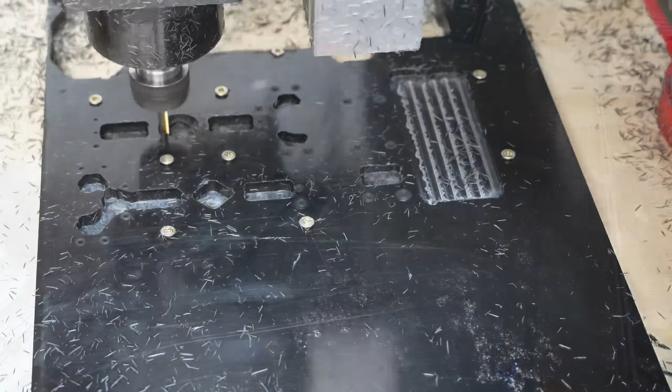Hey there, this is Seth Schaefer from Team Just 'Cuz Robotics, and in today's video I'm going to talk about the design process that I go through to design a competitive 3-pound beetleweight combat robot. This one right here being called Derivative, that's about to compete at the November 1st NHRL, and the many other complications that made it so that even though I had this design 3 months ago, I decided to abandon it and completely redo everything from scratch at the start of this month, even though the competition is on November 1st.

So this bot's going to be competing in 11 days, and I've still got some last minute tweaks and changes to make, which I will talk about. So in this video, I'm just going to talk about how me, as somebody who's been competing in the combat robotics world since 2017 and worked professionally as a mechanical engineer for several years before quitting to run a combat robot company full-time, approaches the design of a brand new combat bot. And you'll be able to learn with me along the way what things I'm thinking about when I go about doing the 3D modeling and design choices for any of my bots.

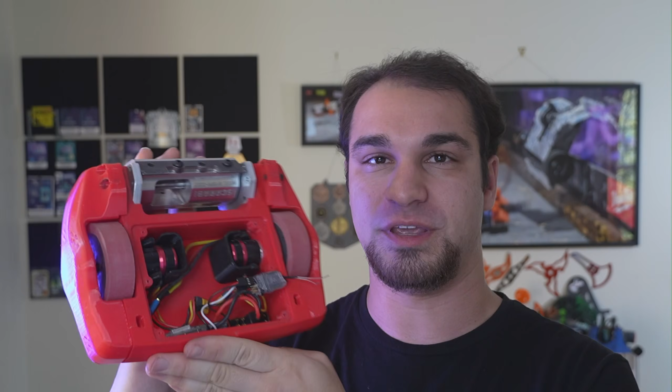All right, I'm gonna leave out some of the details from the first few attempts I made recording this, because otherwise this video is gonna be an hour long. Let's first talk about this thing. This was originally going to be Derivative, although at the time I had no idea what I was gonna name it because I hadn't even entered the NHRL event lottery yet. But I commissioned this design from a builder on the NHRL Discord who goes by the username Rinsler, or just DJ when he's competing.

And Rinsler designed this entire chassis for me about 3 months ago. I paid him for his time. I am not saying he doesn't deserve the money that he was owed. I think whenever he asked me for money, he was paid right away. But I forget if that was up front or just within a couple of weeks of when he started. But either way, his time was compensated. He actually did make some design tweaks to this for me after I paid him too, because I had some issues with transferring everything from Onshape, where he designed it, into Fusion 360, where I work, and he relabeled some things to make it a little bit easier for me to work with his files.

But ultimately, there were too many issues with this design, and the experience that I have making many, many robots that are meant to be mass manufactured from selling the SSP kit, and the fact that I was at least considering trying to make this robot potentially a kit that people will be able to buy in the future, I'll talk about that more later, meant that this design wasn't really going to work for me. There's kind of 3 main reasons why I had problems with this design, and I think most of them aren't really DJ's fault at all. There's one issue that's kind of his fault, but is something that's really easy to overlook and something that I could personally have very easily fixed, so not a huge issue or anything.

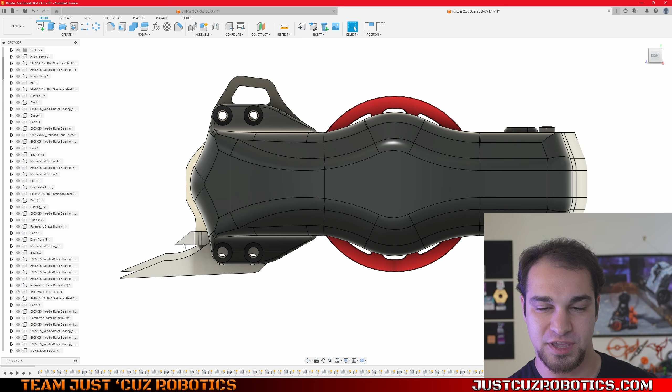And that is just the fact that right now the drum spinner hits the floor. The teeth go just below the aluminum uprights here, and so it hits the floor all the time. Now, it's designed to have forks bolted on. In fact, I can click over to my overlay view. So this is what the bot's supposed to look like. So these forks do stick down far enough that the drum definitely can't hit them, and that's not a problem normally, but this is a combat robot.

Those forks are for sure going to get torn off, and so that was not really good enough for me personally. And also because of the flexibility of TPU and everything, even with those forks bolted on, I had issues with the fork just tilting up and the drum could still kind of graze the floor a little bit, so I just wasn't super happy about that. So the second biggest issue is the assembly process to get the drum on and off of the bot.

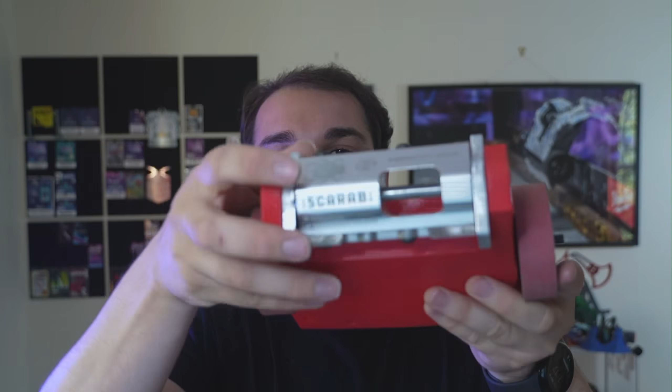So the way that he designed this is actually pretty clever. So there's kind of 3 parts here: this big TPU wheel guard, this big TPU wheel guard, and then this main body. So those pieces kind of fit into slots here, and then there are TPU pins that go in to hold them in the back. In the front, however, they screw on with 4 screws here, and that's not a huge issue, but these 2 aluminum pieces are taking like all of the force.

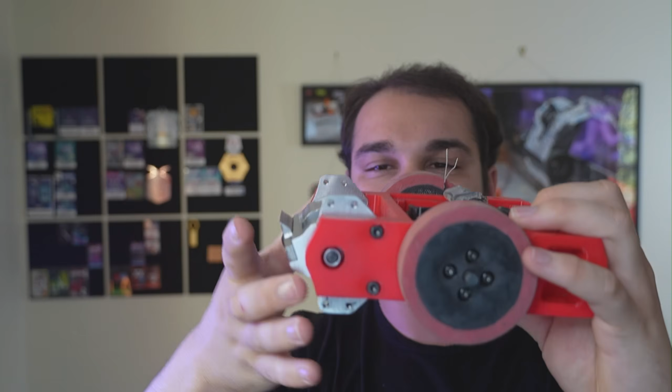Every time this robot hits anybody, drum is spinning like this, so it's going to hit another robot, and it's going to try and plant this into the floor, so all the force path is going from this shaft in the middle straight down to the floor through these aluminum pieces. But those aluminum pieces aren't the only thing that the shaft is passing through, because it's actually passing through a little bit of the thickness of the TPU on this side and a little bit of the thickness of the TPU on this side as well.

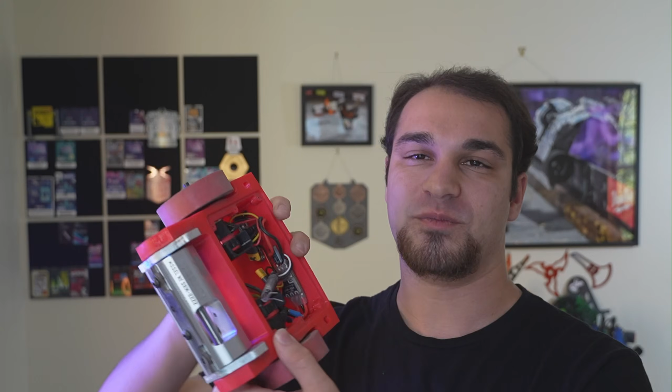So to actually assemble this, you have to fit that shaft through TPU, then aluminum, then a spacer, then this part of the drum, then 2 spacers, then the stator of the drum, then this piece of aluminum, and then this piece of TPU, which is extremely, extremely annoying. So I just found from taking this apart and putting it back together like 3 or 4 times, serviceability in the pits was not really where I wanted it for this design.

And then that could have been fixed. Rinsler and I talked about ways to fix that, which would be pretty simple. Make these pieces, instead of 1/4 inch wide, be 12 millimeters wide, which is how I designed the shaft length for the drum, was to go through either 1/2 inch thick or 12.7 millimeter, or just 12.0 millimeter thick uprights. So if these were all aluminum that was just 12 millimeters thick, that would kind of completely eliminate that problem. And that wouldn't be a real issue.

So again, this is the sort of design change I personally could have made if I felt like it to fix things. But yeah, I just didn't decide to go that route because of the third major issue, and that is 3D printing these would really, really suck if I had to make like 10 or 20 or 30 or 50 of them, because each bot requires printing 2 of these pieces in this orientation on the bed like this. So there's a ton of 3D printed supports under here. So a pair of these takes 5 hours. And then this central body also takes 5 hours. So that's 10 hours of print time per kit on a high-end Bambu Lab X1 Carbon or P1S 3D printer.

And I can't even print both the chassis and the side guards at the same time on my A1 Mini, but I can on the X1 or P1. But still, that's 10 hours of printing per chassis, a lot of chances for something to go wrong and lose a lot of filament in that process. And I'd just be churning through so much filament. Right now I sell the SSP combat robot kits. Those use a billet UHMW machined chassis. It's really, really expensive, but it's, in my opinion, kind of just the best.

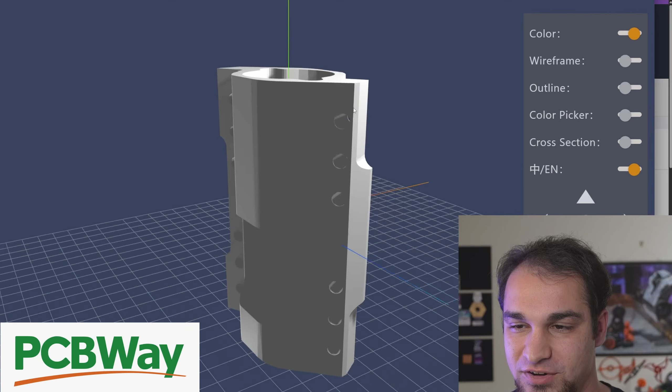Right now, they're actually making a new version of the SCARAB hub drum, and I will show you what that looks like right here. This is the part they're making for me, and hopefully it gets delivered in time for the November 1st NHRL, and I'll talk about why I ordered this later in this video.

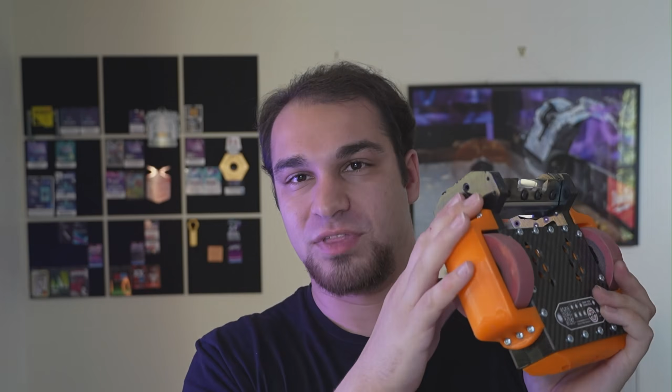The reason that I can do that with these and not with the SSP kits is that these parts are all able to be machined from the top down on a single sheet of material. And I'll show you exactly what I'm talking about. So this is what the frame of the robot looks like, and it's 4 parts, right? You've got left side rail, the mirrored left side rail. This is the same exact thing, just flipped upside down. And then we've got the front panel, and we've got the rear panel, which is that one.

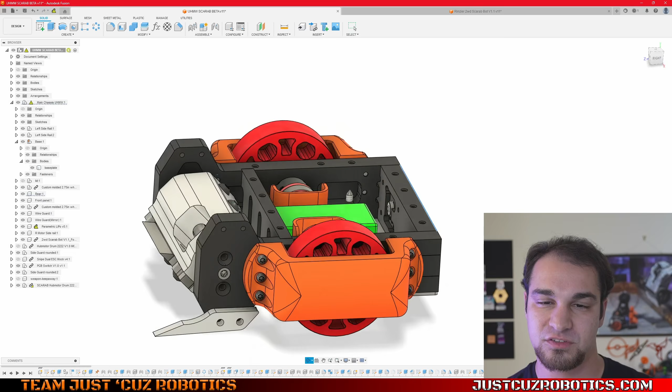So 4 pieces. You'll notice the thickness of this is 12.7 millimeters, or 1/2 inch, because you can buy 1/2 inch stock here in America much more easily, but every other dimension on here is actually designed in metric for the most part. So like this is 102 millimeters wide. That's the spacing needed for this drum, for instance. And the overall length is 156 millimeters. And then the height is 35 millimeters, not including the lids. So from here to here, 35 millimeters exactly.

So I did everything in metric because I am an engineer in America, therefore I am cursed to always be switching between imperial and metric measurements. Sue me.

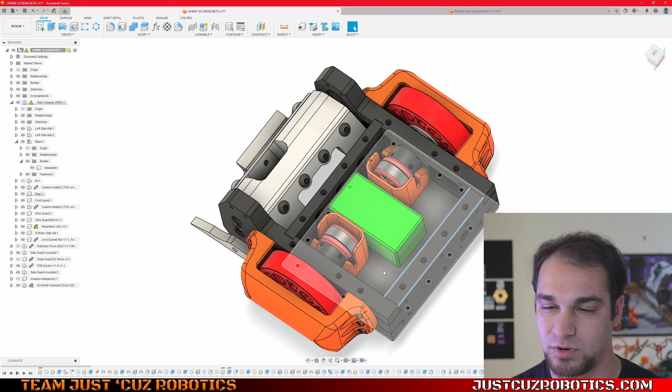So this frame uses all 1/2 inch thick parts for the sides, the rear, and for the front, it's 8 millimeters thick. I can change this to whatever I want, but I decided it doesn't really need to be that thick in the front because this isn't really supporting anything. It's just there to be a barrier and to prevent the battery from sliding into an active spinning drum. And it also needs to have screws to support the lid, so it needs to be thick enough for that.

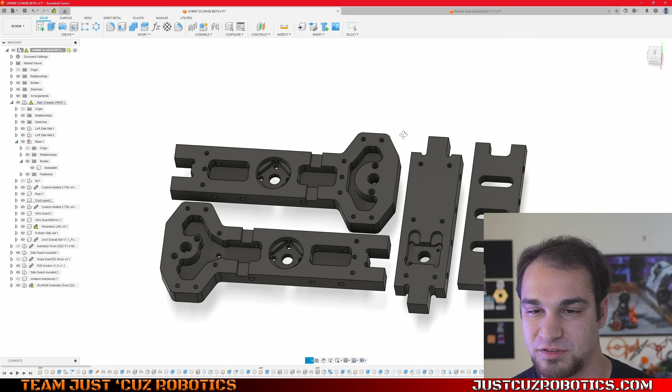So this is what that looks like on my CNC table, basically. All these parts are cut out of a single 1/2 inch thick sheet, and I just face it down to 8 millimeters thick on this part, and then everything else is just machining the same stock thickness. So I don't even have to face off anything else really. And I can just go top down, single operation, cut out everything, leave tabs, cut those tabs with the oscillating multi-tool later to separate the parts, maybe sand them a little bit, and that's pretty much it.

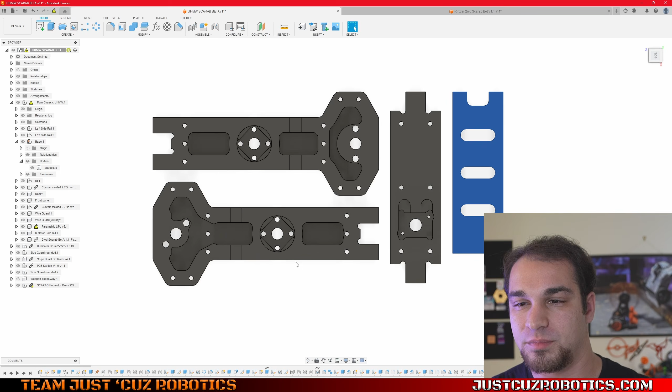So everything else can be done by my CNC except for these holes on the edges. So to do that, I came up with a separate jig that I'll show some video of in action, but that jig is actually just 3D printed in PLA, and it just allows me to slot these into slots like a toaster, and then machine the holes all the way through. I can just drill them all. So that drilling process takes like 10 minutes or something. It's kind of slow, but not too bad.

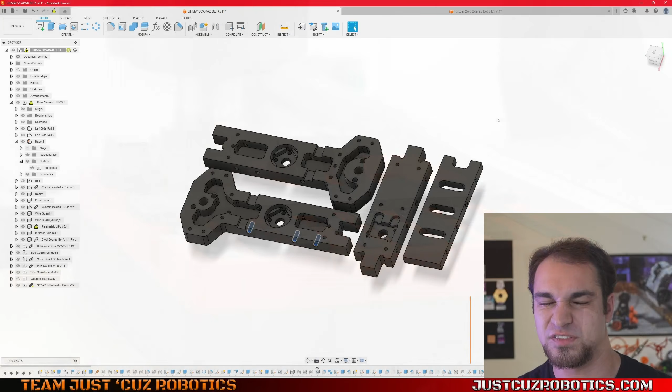And the processing time to cut out an entire frame like this on my CNC is maybe half an hour, plus 10 minutes of drilling. So we're talking like 40-45 minutes of total machine time per chassis instead of 10 hours of 3D printer time. And I can batch these out, so I could just have the machine cut up to 4 of them at a time out of a single 12 by 24 inch sheet of material, which is really convenient, because then it's just like 2 hours of machining at a time basically, or in maybe a 4-hour day, I could get 8 frames done or something like that.

So really not too bad for mass production. Yeah, so I decided to abandon this idea and move on with this idea. And the internals of this are very, very similar. So I guess I may as well just go back to the CAD view and you can see it.

I mean, you were just looking at it, but I'm using the same exact Blitz Pro drive motors, same exact battery for right now, though I did order some custom batteries, same exact wheels, although I also ordered some custom wheels, which the supplier, of course, naturally told me would take 20 work days to produce, which is about 4 weeks, and it has now been 9 weeks and I don't have them yet, so I may or may not be running the urethane wheels that are on there right now at NHRL, but we'll see.

And yeah, the same exact SCARAB drum weapon, of course. So if we go back to my webcam overlay view here, you can see the SCARAB beta drum on here, exactly the same as what was on the TPU copy of the robot. And instead of having aluminum and TPU, I just have 1/2 inch thick UHMW, and the shaft bolt passes all the way through those. Super easy to service because there's nothing blocking your access to this either.

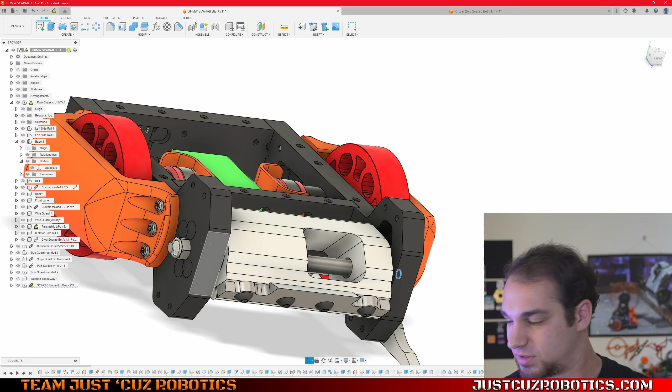So like with the side guards on here, you can't access that bolt anymore until you unbolt the side panel. So you have to pull out this pin, undo 4 screws, pull this off, undo this bolt, undo these 2 bolts, undo these 2 bolts. Same on this side. It's like so many more operations to service the drum on this.

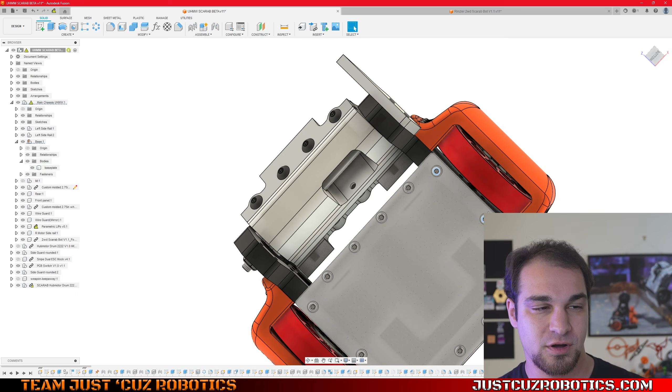Whereas on this version, this looks a little bit messed up because there's something weird with the side panel, but basically you remove these 2 screws on the opposite side for the stator, and then remove this nut and bolt, pull the bolt through, and you're pretty much good to go to swap the drum completely. And if you want to pull the entire side off the robot, that only requires removing these 3 screws, and then the same on the other side, on the top. And then you can pull an entire side of the frame off as well to get the drum back in much more easily. So everything is kind of tabbed and slotted together.

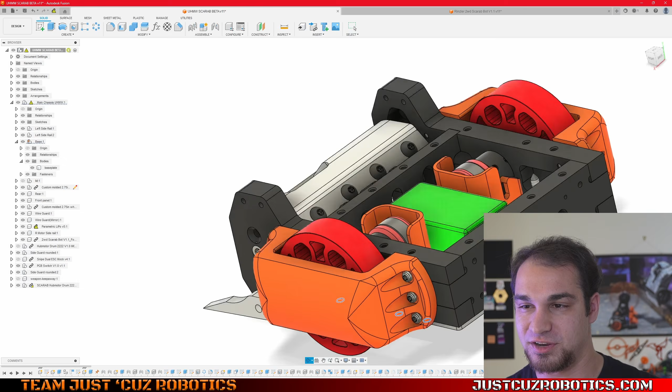If you watched my integration video, you'll know that my frustrations with tab and slot construction being done improperly were quite great in that video. So I did it myself this time, knowing that it would be done correctly. So when you're designing something to be CNC machined, it's being cut with a round end mill, so you can't make sharp internal corners. You can make sharp external corners. Imagine this, right? Here's my end mill. It's 0.125 inches in this case.

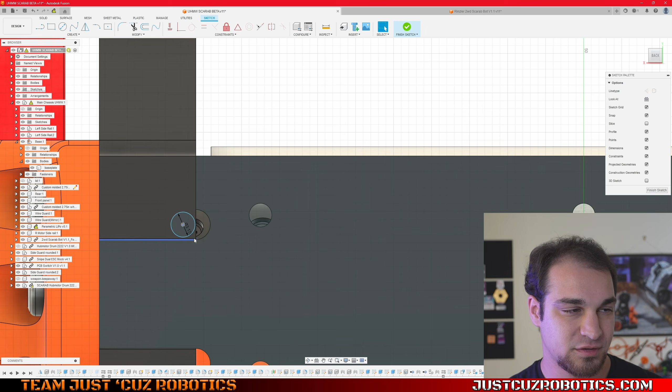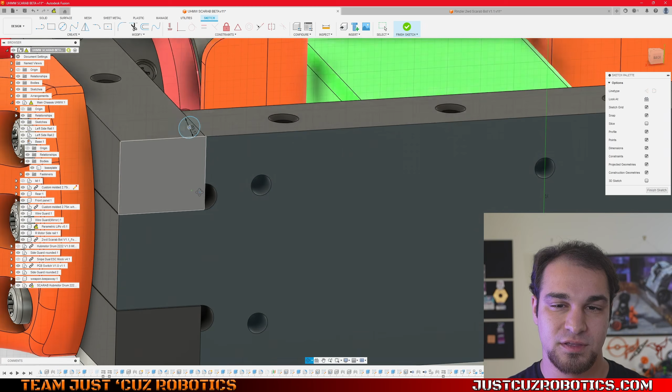So the end mill can travel in 2D space. It can do this path. But if it gets to here and then it goes up, then you've got a radius in this corner right here. So you can't slot the square peg into a rounded corner hole. So that's why the end mill has to go past there. It has to go into this pocket here. And that way I can have effectively a sharp corner, just not really. And so this all tabs and slots together.

So the side panel looks like this. The rear panel looks like this. That slots in. And then the front panel, instead of doing a tab and slot thing where I had a rib that sticks into the side panels, because then I would have had to have dog bone corners in 4 places or something.

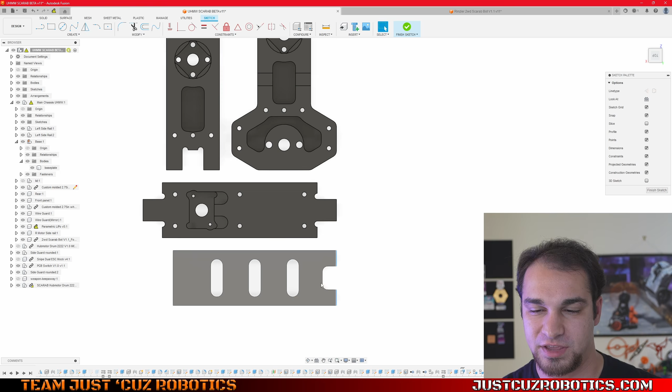Instead, what I can do is take advantage of the fact that with the sides, all I really have to do is cut a channel like this. So I can have the end mill pass all the way out of that side, all the way out of this side, and make essentially a nice square cornered sharp pocket on this piece. And then on the front, these can also be square corners because they're just going into this slot full height. So on one side, there's a gap because the wires for the actual hub motor drum fit through here.

So they go in around here, go down this way, through that front panel gap, and then they come out into the chassis over here. So I can show you on the actual robot. Hopefully it'll let me click on it. So that's that wire path on the actual robot. So you can see it passes through that gap in that front panel.

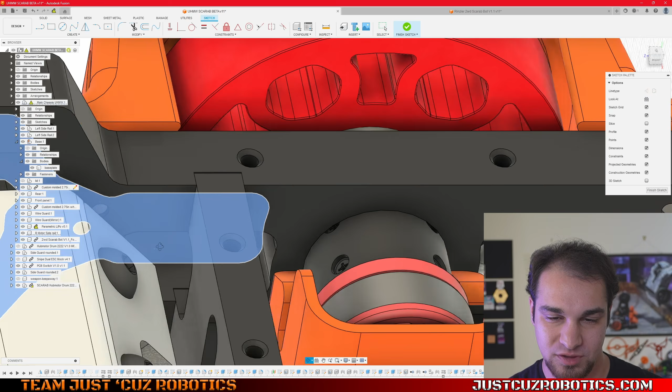So there's tons of clearance. It's pretty easy to get the wires through here. That was also a huge struggle on the TPU version, but again, that's something that could have been fixed. So yeah, as far as getting the hub motor on here, it should be way easier to put it on and take it off.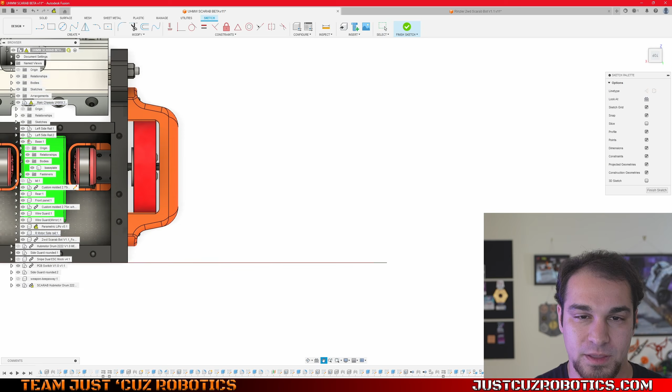Then we've got the drive system. So the drive system is my Blitz Pro drive motor, same that Division version 4.5 is using, but I'm using gigantic wheels. These are 70 millimeters or 2.75 inches in diameter. And so the motors, if we take a look at the side rails again, I just pocket into here. Again, I'm dogboning these corners a little bit and kind of having the end mill go past because there's otherwise kind of a sharp corner here.

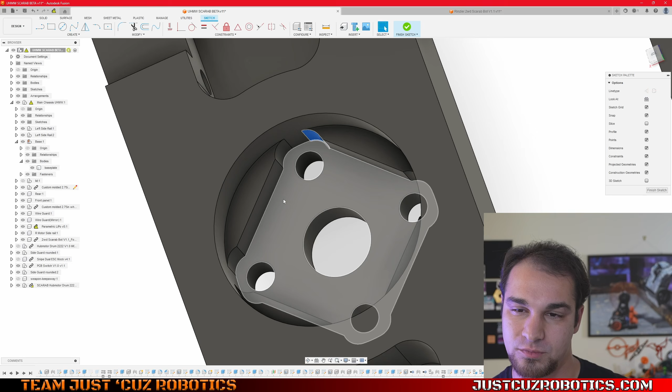So the front face of the motor is grabbed here. It can't rotate because there's a square imprint on it that gets locked by these faces. And then the round gearbox gets supported partially by this feature. And this is just a through hole for the shaft and circlip and everything to get through. So just a much bigger hole than I needed. I think I did an 8mm hole for a 6mm shaft.

So this gives you a better idea of how exactly the gearbox integrates into the frame. So if we look there, it's about halfway through everything. Kind of seeing the internals of the gearbox, that's a little confusing, but you can see exactly here. So that's the round portion of the gearbox, and then the square face plate you can see up here.

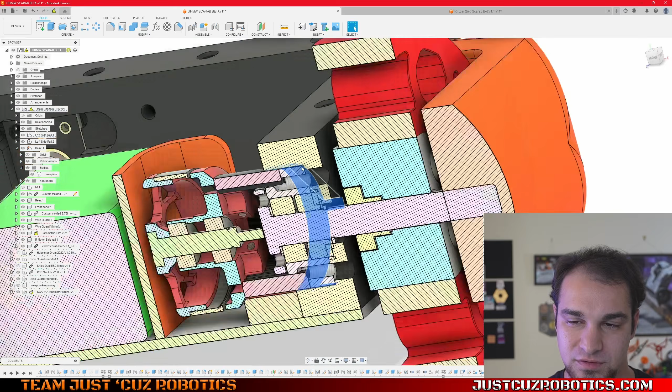And if I hide the side panel temporarily, you can see exactly what the front of the gearbox looks like. So you've got that square imprint. Go back to my cutaway view and put back on the side rail. You can see how it pockets nicely in there. And then I've just got clearance for M3 screws here. And that's pretty much it.

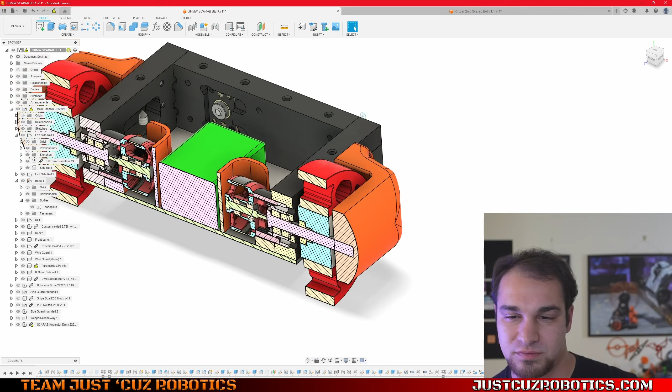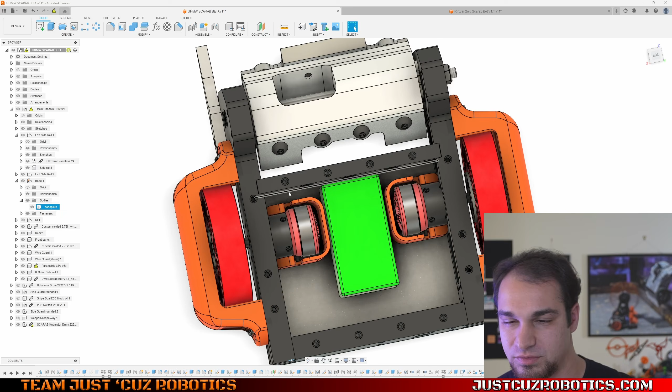So pretty simple. And then these wire guards, I took inspiration from how DJ did it in his design. I actually quite like that because there's no hardware needed to install these. They just get slotted onto the motors from the bottom, and then you put the base plate on and that retains them. And they just can't move forward and back because there's no clearance, which I really liked. So I stole that feature. I redesigned these from scratch, but I stole that feature of his design for my own.

And there's just slots on both sides for this wire channel to come through so that these two parts are 100% identical. Side panels, again, on the production version of this, the side panels will also be 100% identical. It's just on my version right now, because the hub motor wires exit straight through this way, I needed 2 different ones. That's why this looks kind of funky with these overlapping holes.

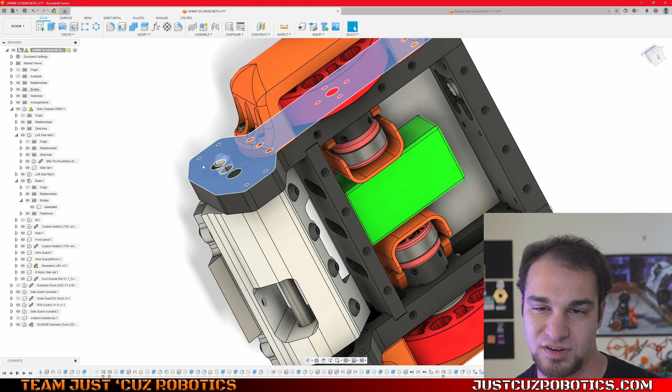There's like 2 side panels on top of each other in the 3D model, but once I have production versions of these hub motors, the wires are going to exit at a right angle, straight back, and just go through this gap. And then both of the side panels will actually just look like this one here, where I don't need a channel that continuously goes through to let the wires through anymore. So yeah, it'll be a little bit stronger, not a huge difference, but mostly you'll be able to use this third screw in the middle without worrying about it going into your hub motor wires.

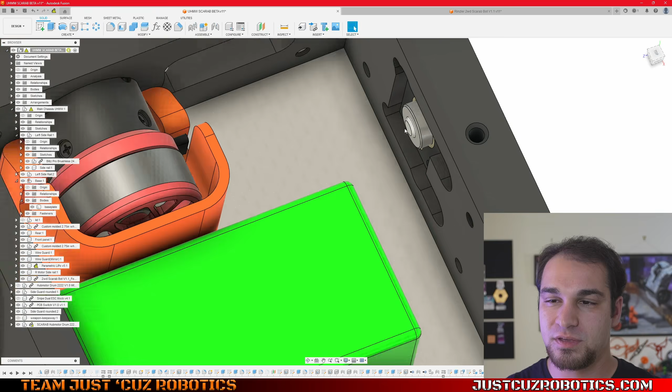So yeah, I think that explains most of the main important surface level things about this design. So let's take a look quickly at the back panel. So the back panel has one of my classic PCB switches just pocketed into it. And that way it takes up basically 0 space internally, except for the wires. You'll notice there's a kind of funky looking pocket here.

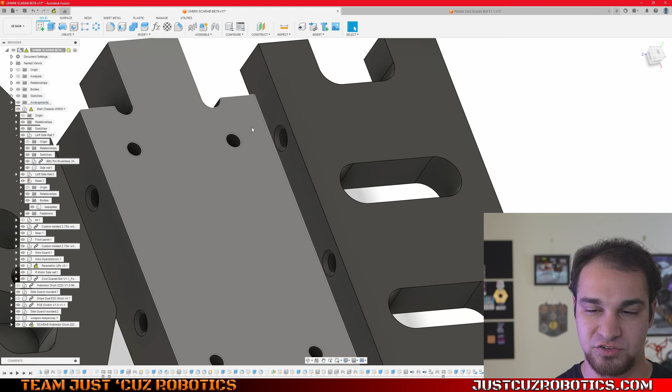The reason for that is the switch is sitting in here. The backside of the switch is going to be parallel with these surfaces, but then you're going to have wires coming in and they want to exit somewhere.

So I figured I can just leave these channels here so the wires have space to exit out the side and bend out here. Because if I just made this a rectangular pocket with a switch in it, then the wires would have to stick straight out, and that would be a much weaker connection that's more likely to break and harder to solder that way. So doing it this way was just simpler.

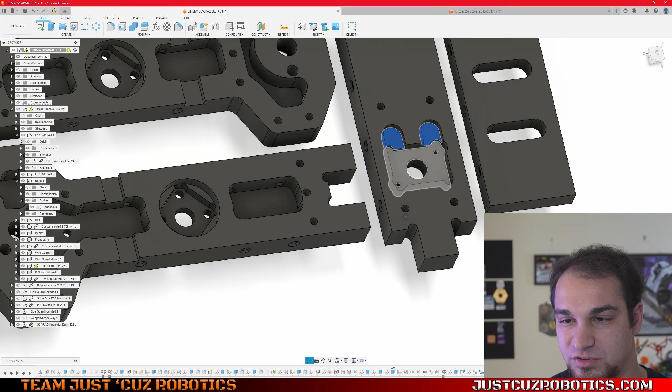The back panel is completely reversible as well, so if, maybe you're left-handed and you really want your power switch on the left side instead of the right, you can actually just straight up flip it so that it's flipped 180 degrees and the switch is on the left side instead of on the right side.

But I just modeled it with it on the right, and I think when I built it, I actually did it by accident so that the switch is... actually, no, I did it correctly with the switch on the right on this copy of the bot. Oh, no, right. No, this is upside down. Okay, yeah, so I accidentally put the switch on the left side on here, and no big deal because all I have to do is design a new piece of this TPU that has the holes on both sides, but this one I just flipped upside down.

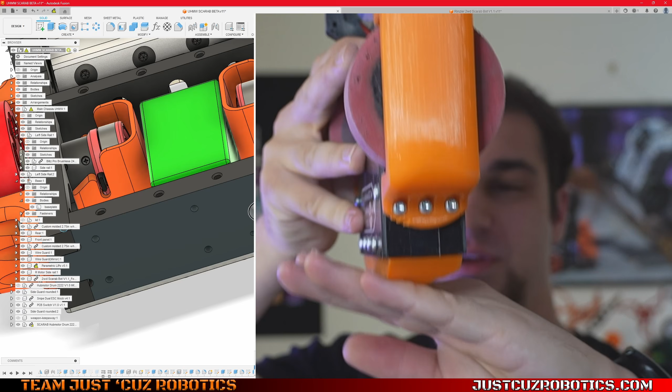It's a little bit asymmetrical because obviously you don't want your bot to be able to get stuck on its back. I don't have that modeled in CAD, but you don't want the bot to be able to balance on its back. And by making this a little asymmetrical, my idea was that it more often will end up rolling onto right side up rather than upside down. If I just made a single curve, not only would it be 50-50, but it would also roll over slower because the center of mass could potentially be balanced perfectly on that center of curvature. Whereas here, the center of curvature is off to the side, so it'll always want to tip this way if it ends up in that situation.

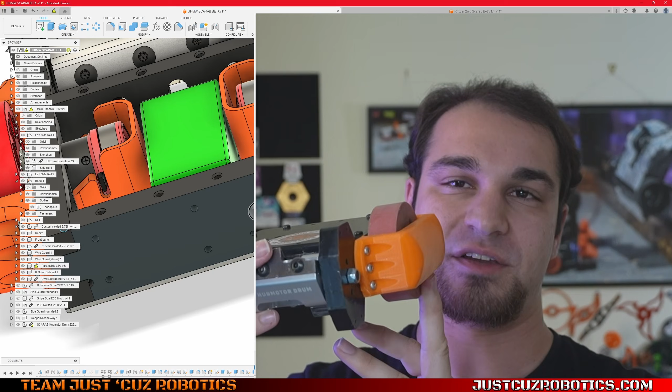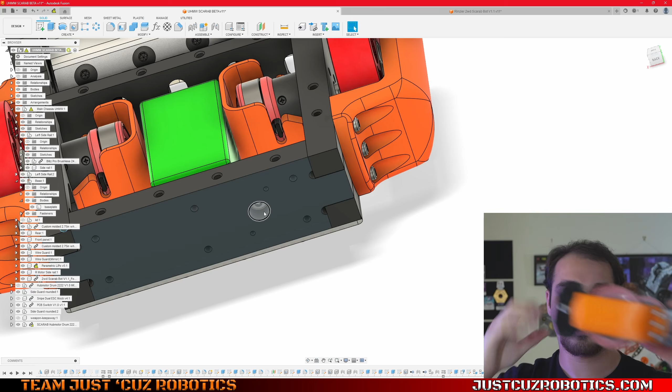And the side panels, same way, they are rounded. These ones, for aesthetic purposes and also practicality purposes, I made symmetric because I want this to be able to be flipped upside down and put on the other side as well. So they kind of have to be symmetrical, so I just live with it being 50-50 whether it falls onto this side or that side. But self-righting with this is actually really fast and easy because it kind of does the Minotaur style gyroing thing. And there's a ton of ground clearance, which I wanted just so I didn't have to worry about getting stuck on anything.

Ground game isn't nearly as important with this style of robot as it would be for something like Division, because the drum is really out front there and it'll hit whatever it runs into. But I did leave extra holes so you can just add forks by bolting them on if you choose. If I do make a kit version of this, I don't think it'll ship with any forks. I might sell some as a separate add-on, but I think it would be a little bit too try-hard of a turnkey kit if I included ground game out of the box as well.

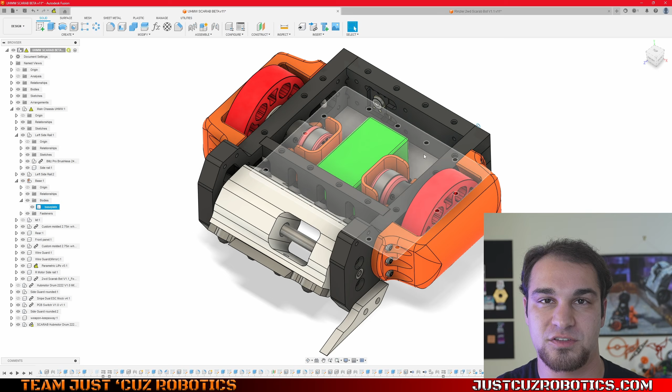But pretty much everything else you should be able to buy. I might even do a version where you can get it a little cheaper with none of the 3D printed TPU parts, just the machined frame and other parts like that, and then print your own parts to save a little bit of cost if you were going to make it a custom color anyway, which a lot of my SSP kit owners end up doing. So yeah, I think that covers all the really important key aspects of this bot.

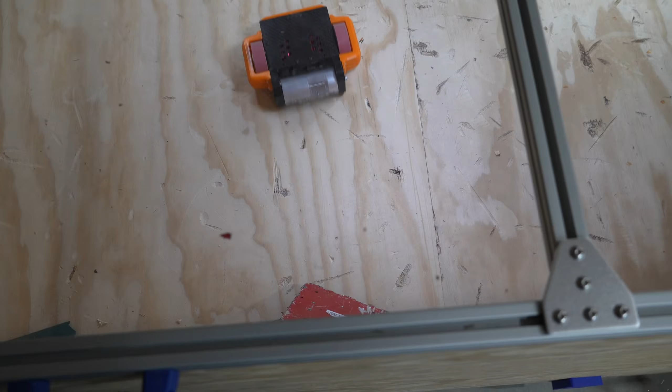Now let's talk about the SCARAB Hubmotor drum and what exactly needs to change with that. So I'm going to show some test footage of me destroying a very expensive custom Hubmotor, and I guess look away if you have sensitive eyes. So I have sent 50 of these beta drums to a bunch of people, and not that many of them actually tested them in combat, which was kind of disappointing and part of the reason that this has taken me so long to get the production batch out.

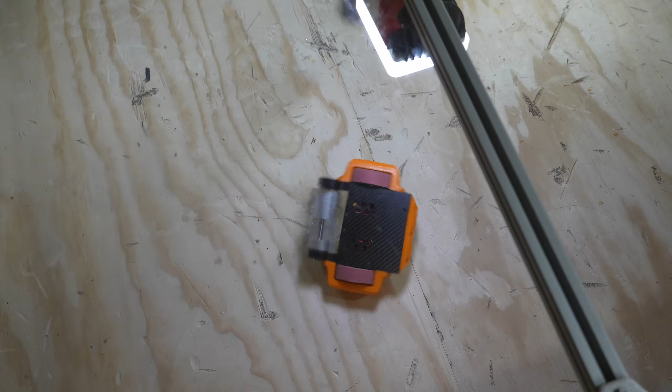But I wanted as much combat testing feedback on this product as possible because it is one of the most complicated and difficult product design experiences I've ever had. Obviously, the entirety of the SSP kit was much worse, but as far as an individual part that goes on a robot, this has a lot going on.

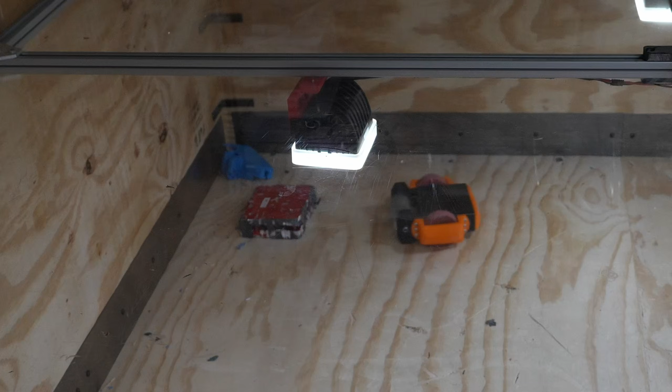First of all, it's got a stator and magnet ring, and that together makes up most of a motor, but then you have to have the shaft, you have to have bearings to support the rest of it, you have to have the aluminum hub, which is really complicated, and I had to try and get as many features as possible into it without the cost skyrocketing, and it needed to be super durable.

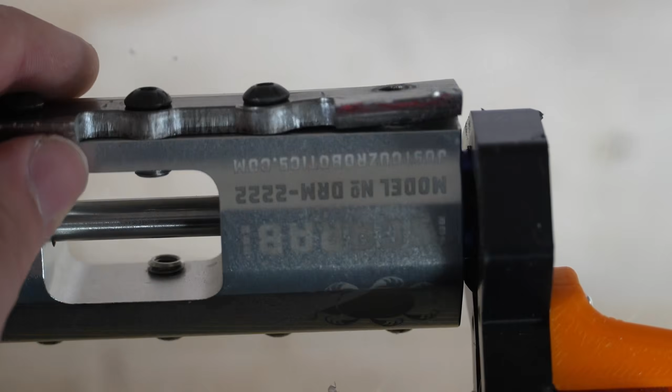The beta ones are made out of 7075 aircraft grade aluminum, and the teeth are made out of AR600, which I had to make a custom rig for my CNC to bevel, and I ruined probably $100 in end mills doing that. It was really terrible. I'm definitely not doing that again.

So there were three key issues that I wanted to solve with the next version of the drum. Number one biggest problem with these beta ones that a lot of people have dealt with, not everybody, but a lot of people, is that the teeth can get ripped off. And the way in which they get ripped off is generally that these M5 bolts, which are only about 5 millimeters deep into the aluminum, as you can see in this cutout here, just get yeeted out. They just tear the thread straight out of the aluminum.

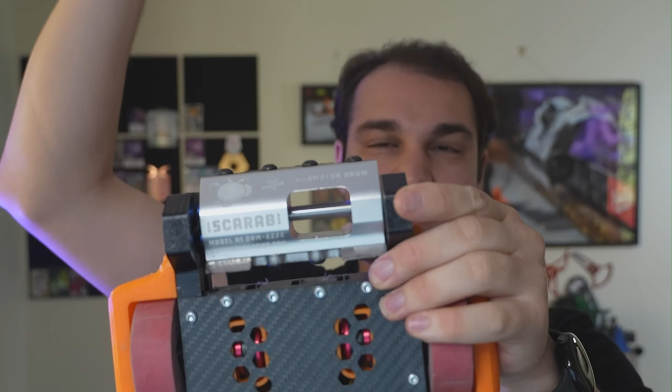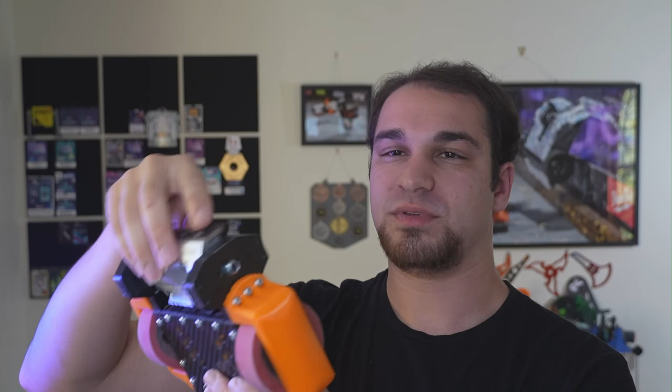Now, I didn't think this was going to be a problem because on my 4935 or Cherry Bomb motors, I have a same thickness blade bolted on with same size bolts with the same thread engagement, and those keep the blades on. But the big difference, it turns out, is that this tooth is really wide. And so what happens is, especially with this tooth here, if this hits on a corner of another robot, basically all the force ends up going through just this one screw.

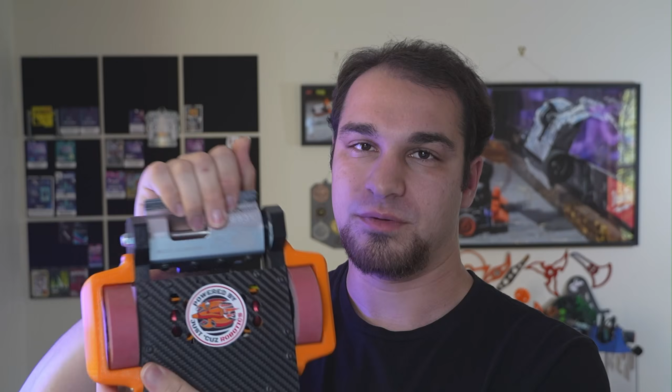And so it can actually bend, and on top of that, the tooth is relatively thin in the back. It's not super thin, but for an AR-600 weapon, kind of thin. So I actually had a case where the entire tooth bent up and this screw got popped out. And you can only imagine how it just zippers out from there once you've got some of the support removed and another hit comes. And that's just with this hitting a 3-pound block of aluminum, not even another vertical spinner or another drum spinner.

So I can only imagine how easy it would be for the screws to get ripped out in an actual fight. And I saw it happen in person at Mass Destruction in the 2-pound multi-bot that ended up winning the event, Sibling Rivalries. They had a tooth ripped out in their very first fight, and then their second Hubmotor drum that they had as a spare was able to get through 5 more fights and win them the entire tournament. But obviously, having one drum destroyed in 6 fights is still pretty terrible, in my opinion. That's not the level of quality and durability that I expect out of my own products, and certainly I don't think you should expect that out of a product.

There are aspects of this that I really did like, though. For one, the motor has tons of power, and for two, the replaceable magnet rings is definitely an idea that I'm keeping, because it's going to make it so that you can use these drums for a lot longer without having to buy a whole new aluminum hub, as long as I can solve the threads being ripped out, of course. So yeah, the second issue, like I talked about before, is that cable management problem.

And the third problem that I had was, in general, the teeth were wearing a lot faster than I expected for AR-600. I think it's because it comes to such a sharp edge. So I'm going to be changing the teeth to S7 tool steel hardened to 53 to 55 HRC, and they are not going to be as sharp.

So what you're looking at here is a SCARAB version 1.1. The beta ones I didn't really have a version number attached to, but tentatively let's call them version 0 point something. Version 1.0 was my first attempt at what the production one was going to look like, and it kind of just looked like this, but with 6 screws and more thread engagement everywhere. But I decided to go a completely different direction after I tested this out with steel threaded inserts and still had the threads being torn out because of how much force gets concentrated on individual screws.

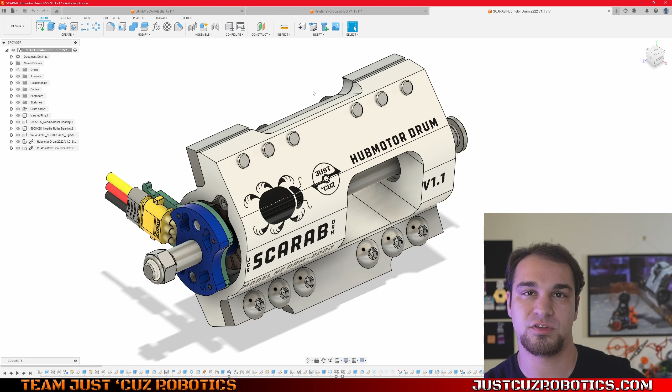So I took some inspiration here from a robot called Warhard, which currently uses a machined single-piece titanium beater and a belt drive system, but in a previous rendition, it was still belt drive, but they had an aluminum drum with steel teeth in a similar style to this. And what I really like about this style is that the steel teeth impact on this surface, not on just a tip here. And then it's just pressing straight back into this aluminum with very little overhang here. There's very little leverage trying to pop screws out.

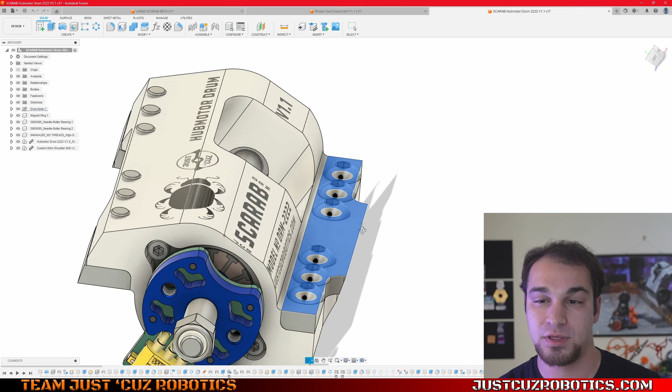The worst thing that'll probably happen with this is if you're spinning slow enough or you're going against another drum that's spinning similar speed, these screw heads are sure gonna get mangled, whatever. But screws are really easy to replace. And if a screw head gets beaten up but not torn off, then this tooth stays attached. And more importantly, I can just have a lot more material right behind the tooth.

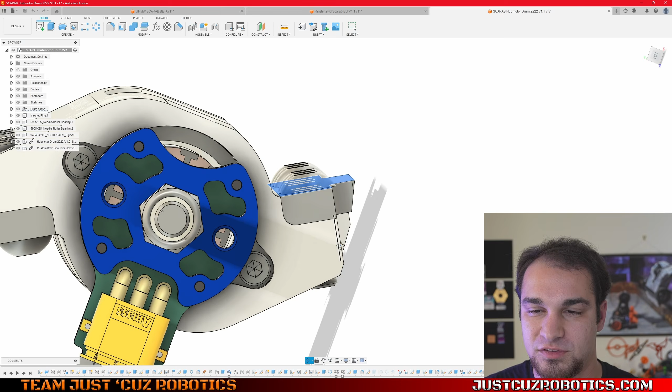So instead of 5mm in thread engagement with M5 by 10s onto a 5.3mm thick tooth, these are now 5mm thick exactly. And then these are M5 by 16s. So they have a solid 9, 10, 11mm of thread engagement. And that way, even if the forces on them were the same as before, it would be like 3 times stronger with 6 of those screws with way more engagement each. So there should be no issues, hopefully, with this zippering apart.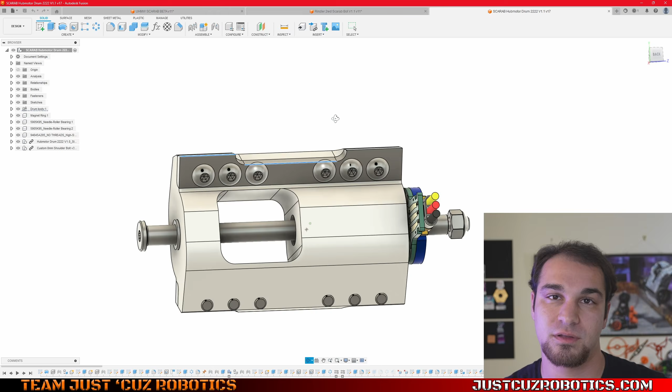And I still kept the kind of asymmetric design. It's not nearly as pronounced, obviously. There's much less of a difference between the height here and height here. But you'd be surprised with how fast these things spin. 36,000 RPM theoretical on a 4S battery. You'd be surprised just how little bite they'll get on average. When I did the math with the previous version,

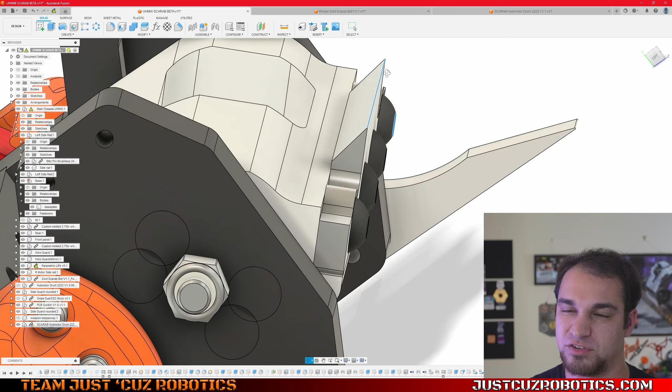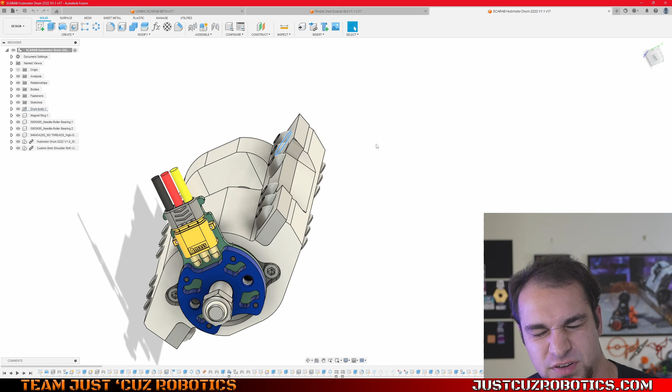basically what I found was if you're looking at the circle that this sweeps through, these screw heads are about 3.5mm behind this tooth edge on that circle that's swept through. But the drum would have to be spinning at 50% speed on a 12-volt battery to come close to those bolt heads getting hit. Whereas with this, I think there's a pretty similar amount before just this edge of the screw gets hit, and that's really not that big of a deal. So as long as you spin the drum at 50% throttle or higher all the time, you should be perfectly fine.

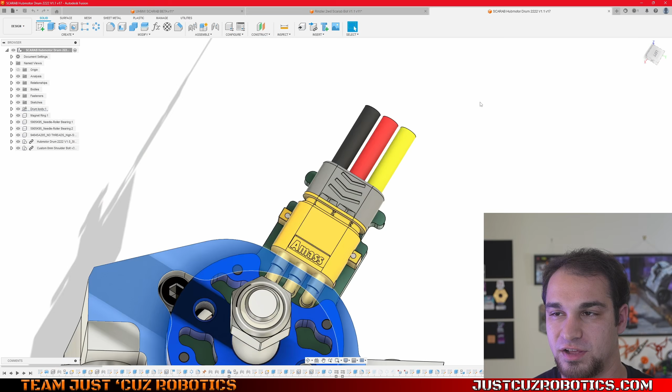Another thing I really like is how much more meat there is around the section where the magnet ring exists. This edge right here, I had one of my drums crack, and that is definitely no good. We do not want to invite mega stress concentrations at the weakest part of the drum. So by changing to this style of tooth, we are able to get way more meat in that area and just in general everywhere around the magnet ring.

And also keep in mind, I'll hide the magnet ring itself here. Again, I was just trying to show, this is how deep the pocket goes where it's actually that close to the edge, and then everywhere else it's actually not close at all to this corner. It just gets close here. This is the thinnest part, but again, also by far the least likely to get hit as long as the drum is actually spinning at any reasonable speed.

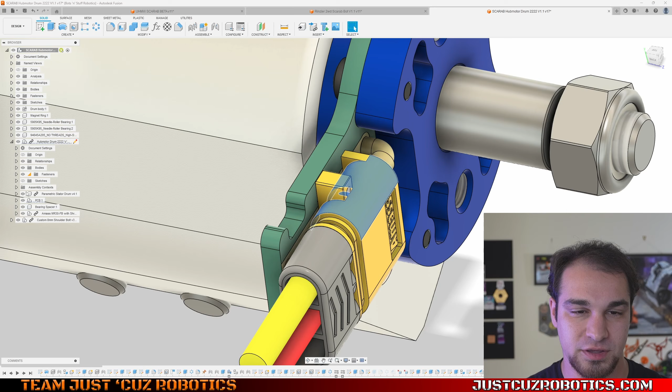And then the stator, the second biggest change is the way that the stator is designed and how you can do wire management. So what I've told my supplier to do basically is what I want to get shipped to you is essentially this. So there will be a bare PCB that has 3 huge copper pads that you can solder wires directly to if you want.

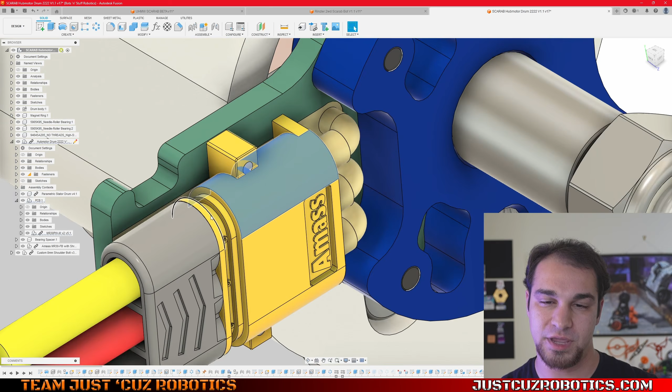And then in the package, they will include an MR30PB-M. So this is the PCB mount version of an MR30 connector with a mating connector that has wires as well. So if you want the convenience of just shoving this on, you can. There is one caveat, which is the MR30 is kind of tall.

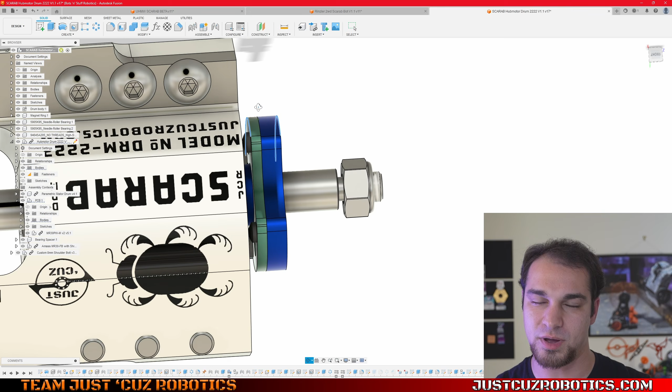And I was talking a lot with some bot builders who are pretty experienced and some people who tested the SCARABs. They basically all told me, I want this distance as thin as possible because this is kind of a weak point that could get hit. Technically, you can actually pocket this entire PCB plus this. You could pocket this into your uprights, especially if you're 3D printing and you can just make things arbitrarily thicker. Because this isn't spinning. It's not like a belt that needs to be rotating. This is all stationary. So you can actually pocket all this straight into your upright and not have it be exposed.

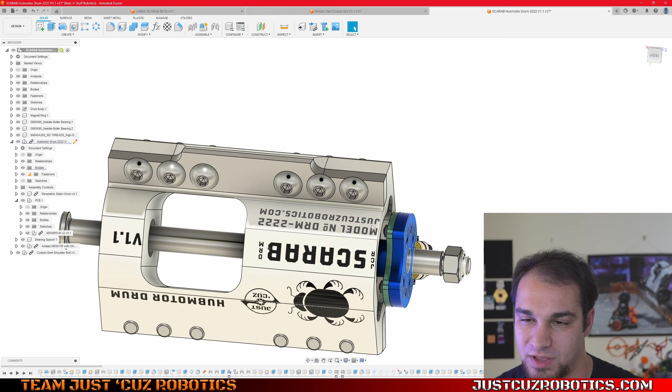But if you're doing the 102 millimeters between uprights thing and you just have flat uprights like I designed the kit version to have, then you'll have this like 8 millimeters exposed. And I didn't want to extend that to like 10 millimeters, and these connectors are thick. So if you do want to pocket just like, I think it's 1.3 millimeters into your upright so that you can fit this connector, that's up to you. Or you can just leave off the connector and direct solder. So I'm giving customers the ability to choose that. At least that's the plan right now.

And then stator mount, there's 2 M4 screws here. You might think that's not enough, but keep in mind, this shaft is doing everything except preventing the stator from spinning. These 2 M4s, even a single M3 would be plenty for this. These 2 M4s are purely insurance against the entire thing twisting.

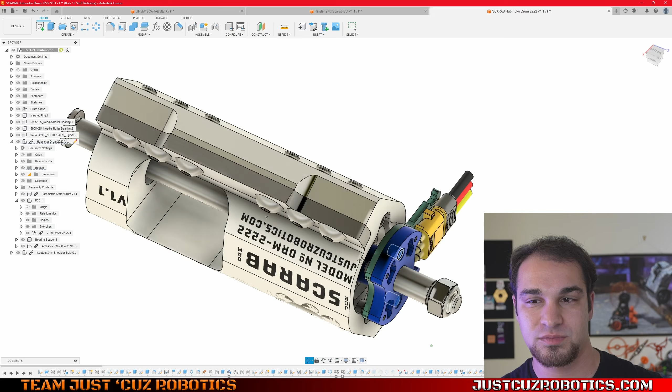And if you pocket this into your frame rail, you don't even need to use these because this huge section here and the huge PCB sticking out here pocketed into your frame rail will obviously also prevent it from twisting. This is just to counter the torque of spin up, the force that happens when the drum spins up. And this drum spins up real fast. It's like a 1 second spin up time, maybe 1.5 seconds. It's on 4S, so it's pretty scary.

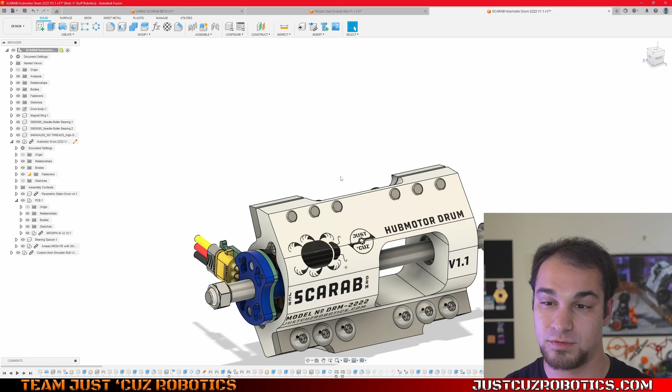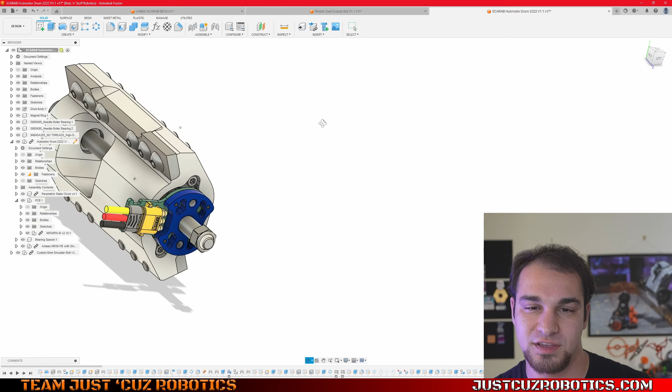All right, I think that covers pretty much everything I wanted to cover. I tried to rush order just this aluminum part, so I'm going to be making a weird Frankenstein motor that has the old stator with the new drum at NHRL if it gets here in time. And that, I think, will be a good way to test exactly how much better this design is, if it's better at all, or maybe it catastrophically fails in some way and I'll have to tweak it and fix it. But I think this is a lot more promising personally.

So yeah, that covers everything I wanted to say in this video. It's already getting pretty long based on the time codes of recording I've got here. I think we're pushing like 35 minutes of info, but my design reviews always tend to be pretty long because there's a lot to talk about, especially in this one, as I'm talking about 2 versions of the robot and an in-depth deep dive on an as of yet unreleased product as well.